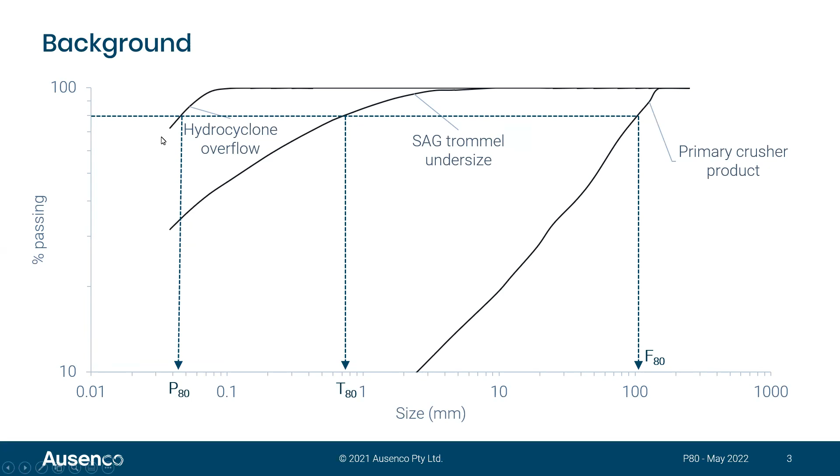So if you use this T80 on the transfer size, it actually results in a much coarser size distribution than you'd expect from the amount of fines. Or put another way, the amount of fines is much greater than you'd expect with that T80 if the slope of that line was parallel with the primary crusher and the cyclone overflow.

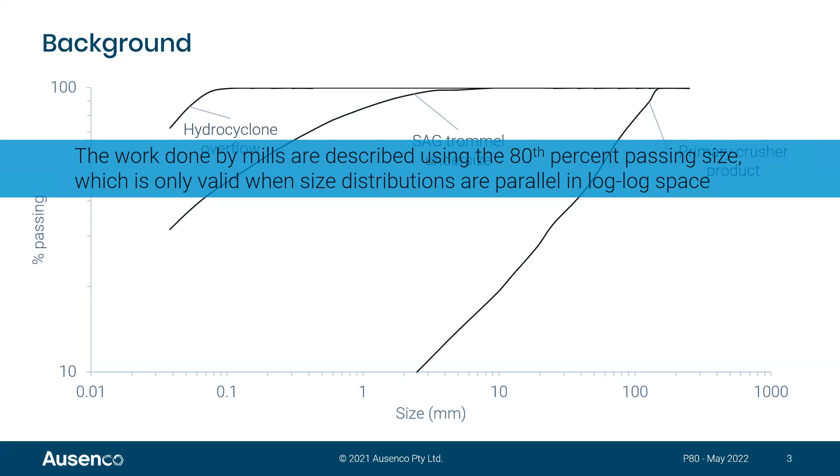So what that results in is that the work done by the mills can be described using the 80th percentile passing, but it's only valid when the size distributions are parallel in log-log space. And the reason that the size distributions aren't always parallel is due to differences in classification, breakage mechanisms, particle selection processes, and they can result in these non-parallel size distributions with more modern equipment like the SAG mill and the HPGR and the stirred mills that weren't really used in Bond's day.

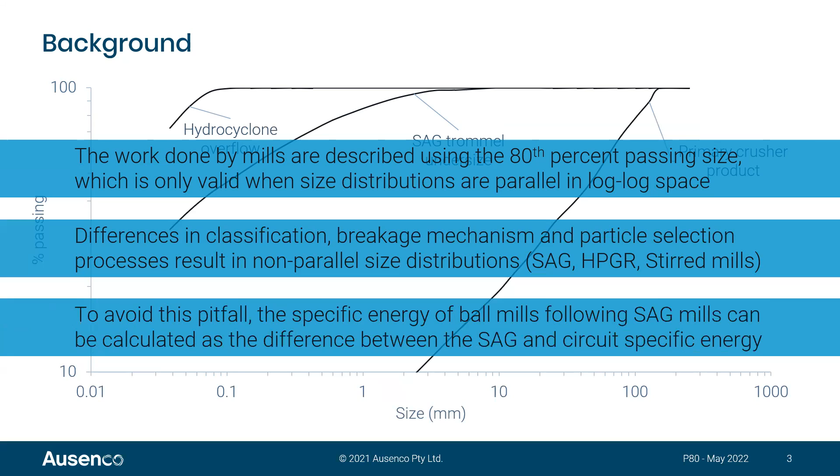And so to avoid this pitfall, and Morrell was the first one to look at this, I think, we can use the F80 of the primary crusher product and the P80 of the cyclone overflow because they're parallel in log-log space, and then calculate the SAG mill specific energy separately and use the difference between the SAG mill specific energy and the circuit specific energy to calculate the ball mill specific energy requirements.

So that's what a lot of calculations do nowadays. There are still some calculations that you'll probably be aware of that still do use transfer size, and they get around this in a multitude of different ways.

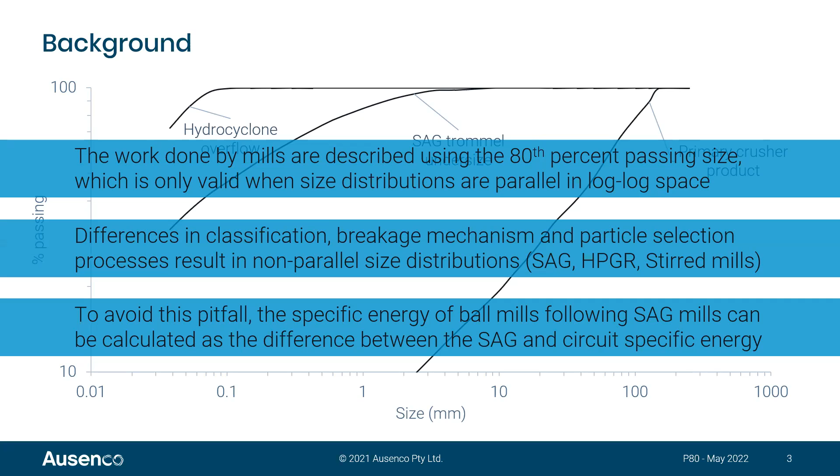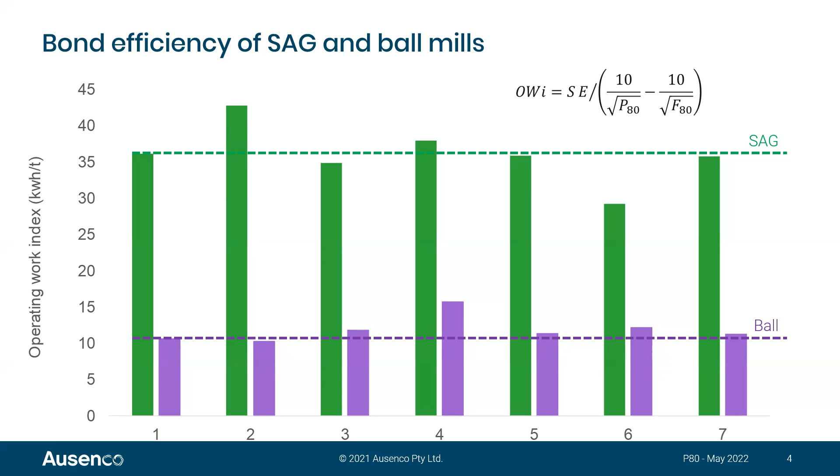If you use that T80, the SAG mill looks like it's expending a lot of energy for not much reduction in comparison to the ball mill. And that's the issue around using that 80th percentile passing for SAG mill products. So yeah, 3 times the energy or more in this way of looking at it. So this is what I was saying. Using the T80, this is what it looks like.

One of the things I'll be talking to you about in this talk is using the fines production instead. So at the fine end of the size distribution, that is typically more closely related to the surface area production. The surface area of the fines is much greater than the coarse end. And if you look at Rittinger's theory that energy is proportional to the surface area production, we can use this fines production as a proxy for surface area.

You might ask, why don't we use surface area? I found it difficult to measure surface area. There's a multitude of different ways of measuring it, and the measurement of surface area is dependent on the way it's measured. Anyone who's looked at measuring the circumference of a continent in high school, you'll remember that it depends on the actual size of the rulers that you're using as to what you get for a continent. Same's true of particles. So this is a simpler and more consistent way, I think, of looking at that.

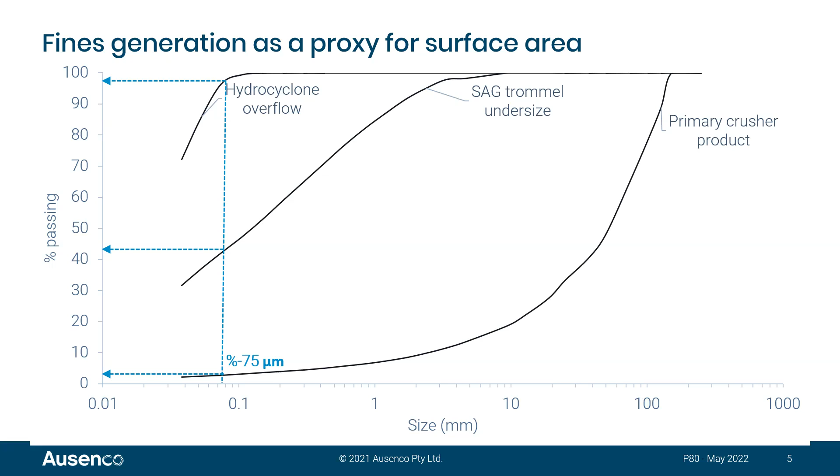So if we look at, I'll just go back to this. So the production of fines, we can look at that against the specific energy consumed, and that was called size-specific energy by Malcolm, who's on the call. So he kind of coined that term in 2010, but there's been many different people that have used it before. So we can look at Marco, who's also on the call, who looked at using the kilowatt hours per ton minus 75 micron.

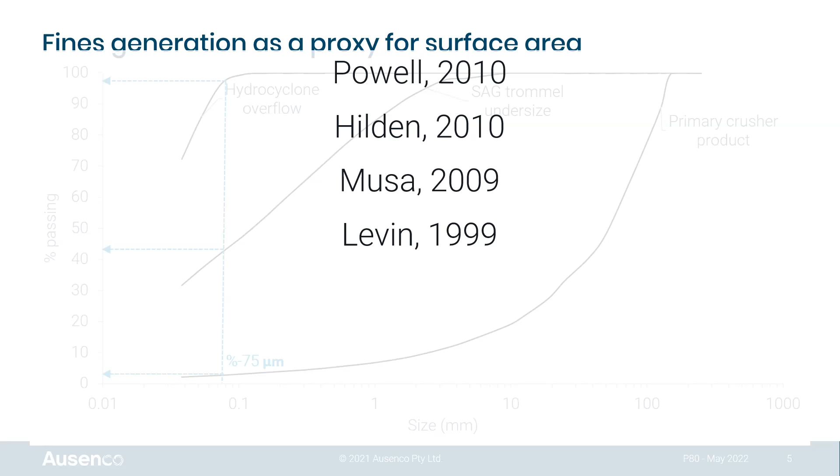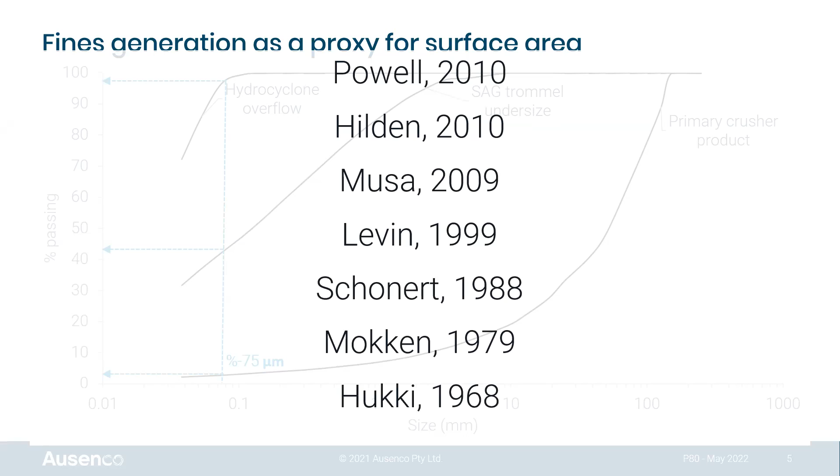So in 2009, Musa looked at it, and prior to that, Levin, who produced a whole grinding test related to this. Schonert actually presented some data in this way in 1988. Mokken was in South Africa, looked at different mills, milling efficiency and discharge efficiency based on the production of 75 micron per specific energy.

And Hukki also looked at this in 1968 when he was looking at the efficiency of ball milling. But the earliest reference to what we now refer to as size-specific energy was actually Davis in 1919. So well before Bond, actually. Davis, when he was looking at his fine crushing paper, looked at the kilowatt hours per ton of minus 200 mesh produced, and actually 200 mesh is about 75 micron. So this has a long history of being used.

I guess I'm one of the newest converts to this, and someone that looks at this regularly nowadays, and I think it's even more important nowadays as the shape of size distributions is more irregular in a lot of breakage devices. So when we look at size-specific energy, I've got the equation on the top right. It's pretty easy. Specific energy divided by, in this case, 75 micron generated. So the 75 micron in the product minus the 75 micron in the feed.

When you look at that same data that was presented before, where the SAG mill looked like it consumed 3 times as much energy for size reduction as the ball mill, when we look at it in terms of size-specific energy, so the production of fines, they're actually on par with each other. In fact, there's 3 tests where the ball mill is more efficient. There were 3 tests where the SAG mill was more efficient or consumed less energy for 75 micron production. And there was one test where they were essentially exactly equal.

And this is what I've seen over a number of different surveys. This is just one data set. But there's been a number of different surveys where I've looked at this and found that in general, when the SAG and the ball mill are operating at similar efficiencies, they receive a similar size specific energy, and they can be compared on equal terms using this measurement.

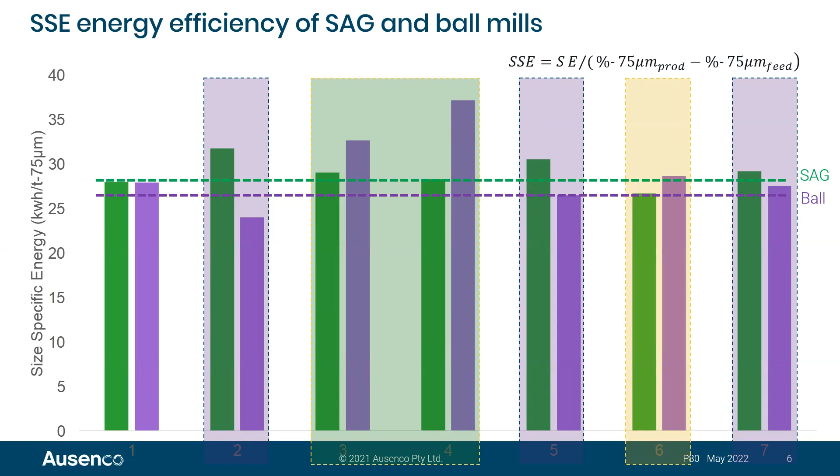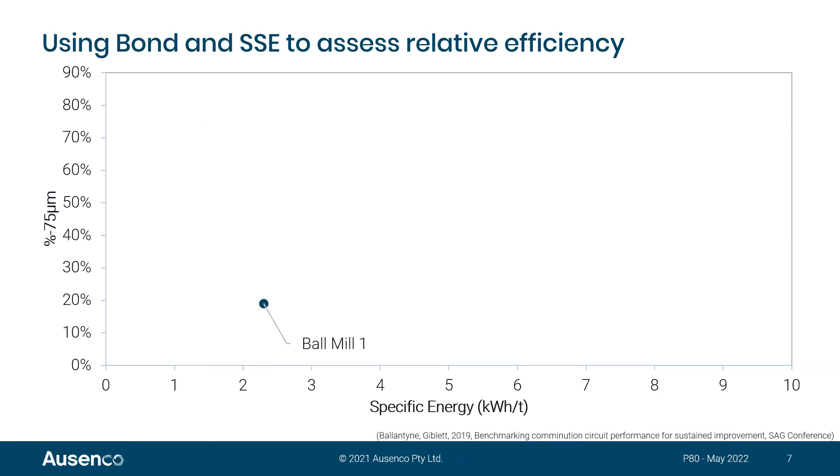So the other thing that you could do here, so you can present it as size specific energy, but the other way you can look at it is by plotting the 75 micron generated, or the percent minus 75 micron generated, against the specific energy consumed. And in that way, you can plot individual pieces of equipment and compare them against each other. So we can look at where the circuit sits here, and you can see that the SAG mill in this specific case consumed less energy to produce 75 micron than the ball mills did.

So there's this potential improvement that you can see here if you're able to get the ball mills to produce a similar amount of 75 micron for the specific energy consumption. But that's just comparing individual equipment. What I presented in this SAG conference paper that's referenced below is that you can actually benchmark this against the Morrell or the Bond efficiency. So compare it against standard characterization techniques. And that gets you your final point here.

And we can see what the potential then is of each one of these mills and measure the efficiency of those mills. Those arrows don't line up, unfortunately, but you can imagine what I'm saying there, and you can look at the paper for more information on how to complete those calculations.

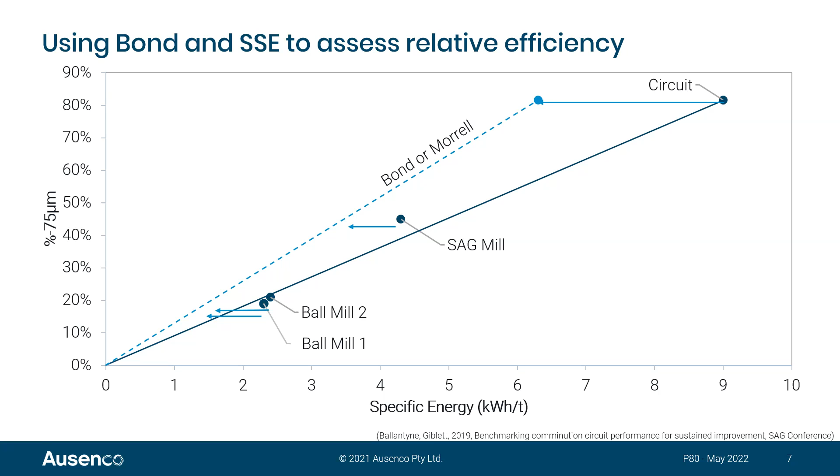But for those keen-eyed observers amongst you, you might have noticed that I'd used 75 micron in this example, but actually in the hydrocyclone overflow, we're not in the linear component of that size distribution. We're right in the shoulder, and we're above 90%. It's never a good idea to use a marker size that's above 80% of the final product. As Bond noticed, the size distribution does tend to roll over above 80%. So when you use a marker size that is above that 80th percentile, it does result in incorrect results, I guess, as most of the surface area is in the finer proportion.

So there is nothing magical about 75 micron. It was used in all of those publications that I referenced earlier. That's because it is very useful in typical plants, but there's no magic about it.

And actually, what I found is that using the P80 of the final product, the cyclone overflow, you can look at the percent minus P80 of the SAG trommel undersize, and that actually changes the mathematics of the equation, and you can have a measurement for the ball mill that is independent of the SAG mill. I said earlier that typically we do our sizing.

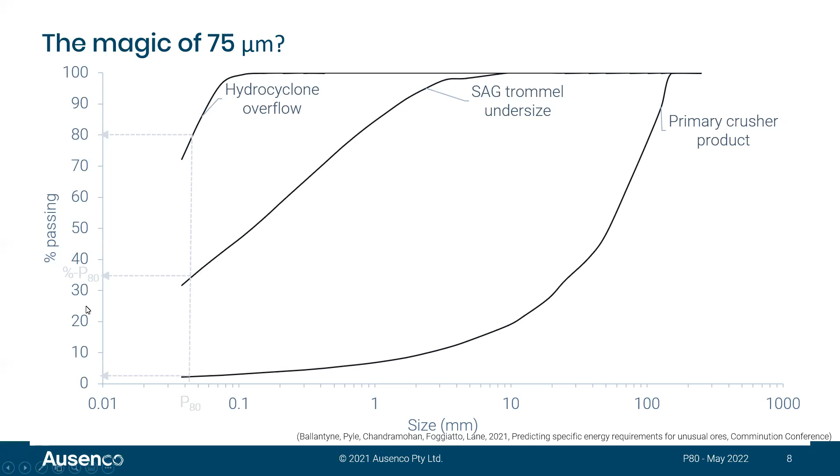But just to show you how that would work, here's some data from Saucito, and that was collected by Juanjo, my student at the time, and myself in Mexico. And here we didn't use 75 micron, we actually used 53 micron. That was a better measure for this particular plant.

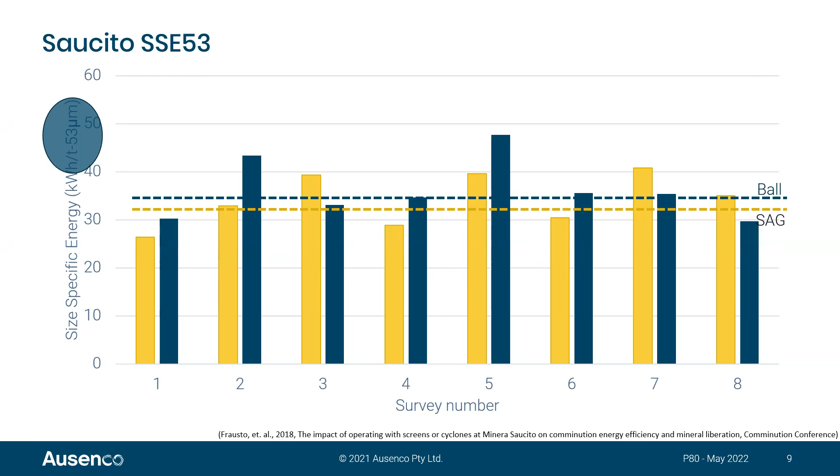And here you can see the SAG and the ball mill. Similar, we had 8 surveys, and they had similar performance across the size-specific energy. But there were differences in the different surveys, and those could be explained with different operating practices there.

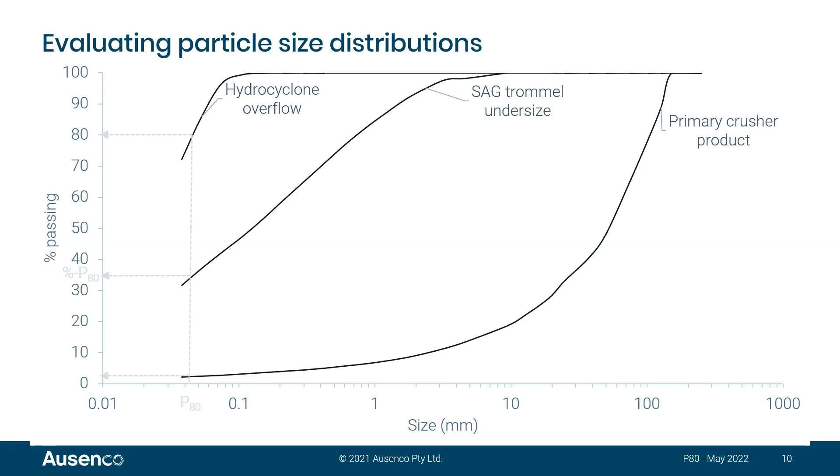So we can change the marker size, but the other thing that always concerned me or interested me was if we pull those into log-log space, which we're now in here, what happens if we include the gradient at that point where we're looking at the marker size?

So I started trying to look through this. I guess this is the part where it's more research, and I don't have any good conclusions, just some interesting trends that I've noticed. And this is the point where I think a lot more research could be done, and I hope it is done, and that maybe people in the audience take this up.

But if we look there, not necessarily at the gradient, but at different marker sizes. What if we use 75 micron, 53 micron, 38 micron? We use a whole range of different marker sizes. We can look at the size-specific energy at multiple marker sizes.

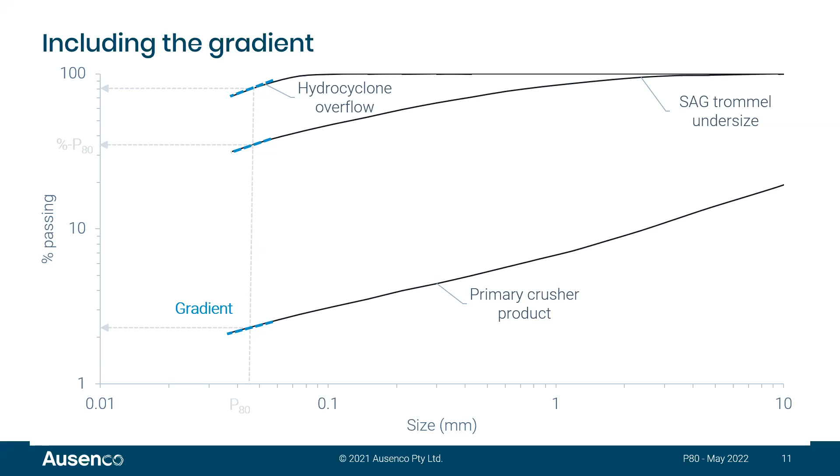So if we go back to that Saucito case that I was talking about, we can do the size-specific energy at multiple marker sizes. So if we look at the SAG and the ball mill alone, this is the first survey. The ball mill consumes more energy at the 53 micron than the SAG mill. And if we look at multiple different marker sizes, you can see this trend starts to develop for the SAG mill.

There's a linear trend in log-log space, and the ball mill has this linear trend up to a point where it starts to roll over. And that's because actually at that point, it's an incorrect marker size. So this is when we go beyond that point that I was talking about where above P80, the size distribution starts to roll over. So this is a good way of also working out where an effective marker size would be.

But looking at the different marker sizes, you can compare the SAG and the ball mill once again at multiple marker sizes, and they have a similar relationship, and they're parallel in log-log space. Now that was one case. There were multiple surveys. One of them was low density in the ball mill. That's why the ball mill was underperforming in this case on the left.

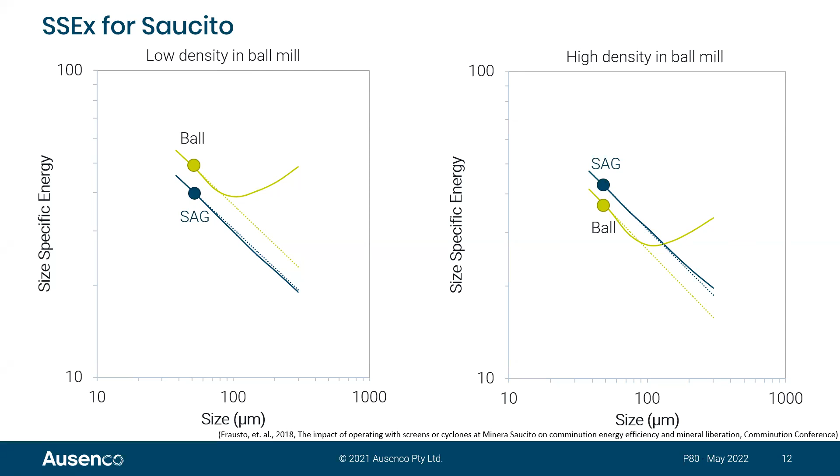And this is when some work that Dion, who's also on the call today, started coming up in my head. He has always been interested in fractals, and he can explain this much better than I can. But for those who are interested, there's a lot of work that was done in the 90s on fractals, and determining the fractal nature of fracture.

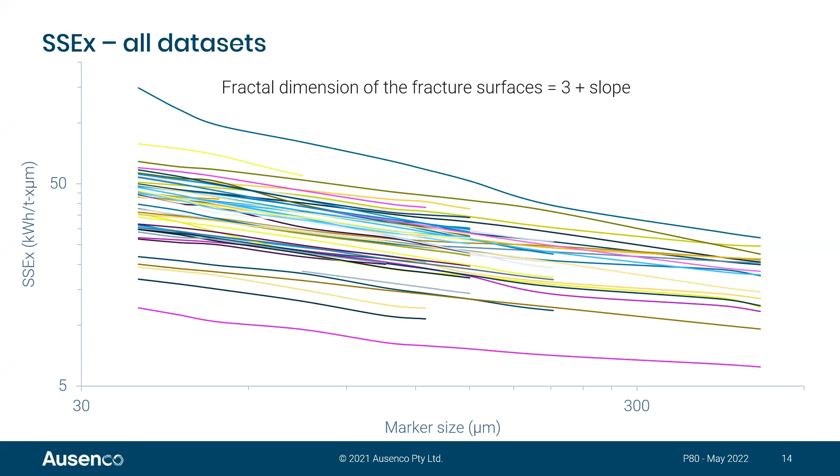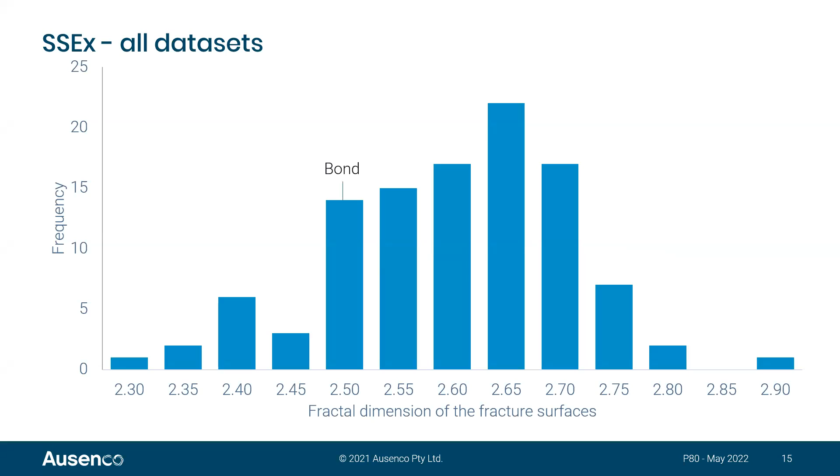And when you looked across this database, I saw this very consistent slope turning up. And actually, across the database, they were very similar. And I could have a look at the distribution of that. So if we look at the distribution of all those data, the fractal dimension of the fracture surfaces range from 2.5, which actually represents Bond, up to 2.6 and possibly as high as 2.8, which is actually the Morrell area. So if you look at Morrell's initial gradient term that he coined in some of his work, that actually relates to this 2.5 to 2.65 region.

So I thought this was interesting, and I thought it was a way that we could maybe describe these size distributions, and it does tend to be ore specific. I've found a lot that has said this is ore specific, but it's also equipment specific. And I'll show one of those scenarios at the end, with some new stuff that I've done more recently. But yeah, that I think has a long way to go. I still can't explain it well, so I don't think I'm going to be the one to take it forward. But I think this should be picked up and used in research, and someone should look into this in a bit more detail.

So I'll now go into some recent examples of using this. So one is coarse stirred mills. I presented a paper with a couple of colleagues at the Mill Operators Conference last year that looked at coarse stirred mills and the efficiency of coarse stirred mills. The example on the right here is a survey of a stirred mill following an HPGR. And if you took the final slope, the actual size distributions there, the stirred mill was operating at about 68% efficiency in comparison to Bond.

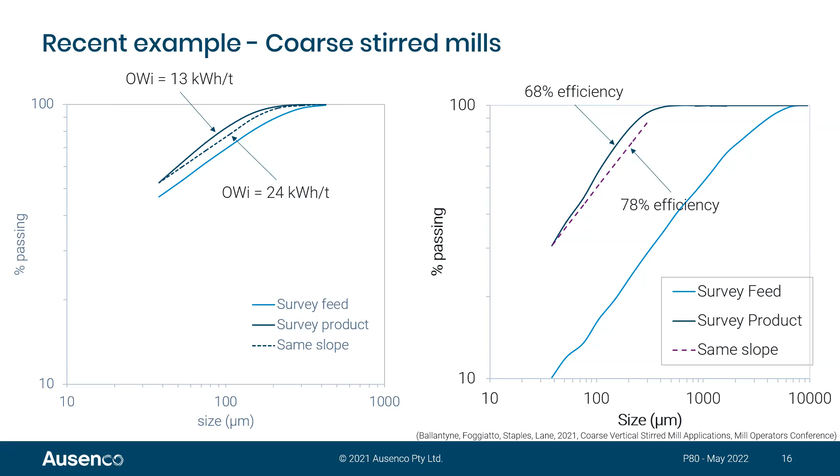Another recent example, this is actually modification of test work. So we received these 2 rod mill tests. We only had 2 tests, unfortunately. There wasn't much sample for a specific study that we were doing at Ausenco. And there were 2 rod mill work indices. One came back at 10.5 and one at 6.8. So there was a marked difference between these 2 tests. Now, which one should we trust was one of the first questions that came up. So I actually did the size-specific energy work on this, and I looked at the percent minus 300 micron in this case in the feed and the product.

And when I actually did the size-specific energy of those tests, they came out exactly the same. So although the rod work index was different by about 40–50%, the size-specific energy was exactly the same. So I went, well, what's going on here? And the issue was actually the difference in feed size.

So test 1 had a much finer feed size. There's also this bimodal distribution, which is a bit of an issue as well. But test 1 had a much finer feed than test 2. And because it had a finer feed, test 1 required fewer revolutions to get to steady state. So it had a coarser product when you looked at the fines production. The P80s were very, very similar, but the fines production then went away from each other.

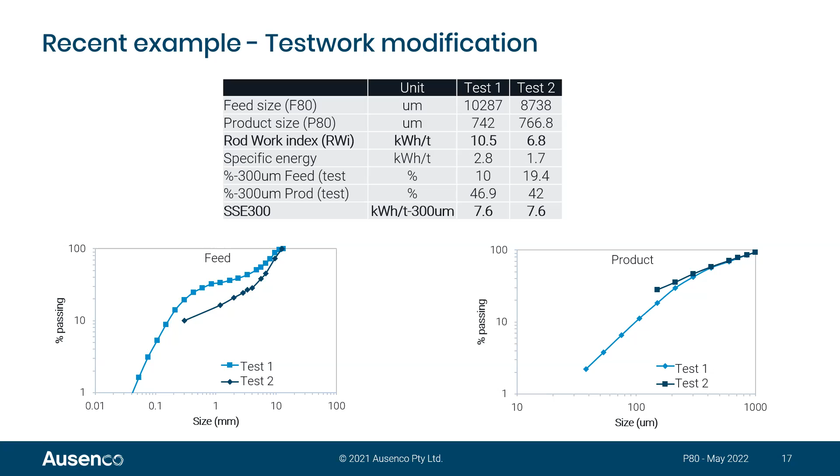So that then allowed us to design on 7.6 kilowatt hours per ton minus 300 micron. So we had a consistent basis to design on, rather than this variable rod work index that you can see above. So that was another way of looking at size-specific energy.

And this final one, back to fractals, and the differences between HPGR and stirred milling. You can see here in these test work, the stirred mill results came out with a much lower fractal dimension. So they tended to more bulk splitting, less crack branching than the HPGR results, which had a much higher fractal dimension. It was still lower than the SAG mill, but it was much higher there.

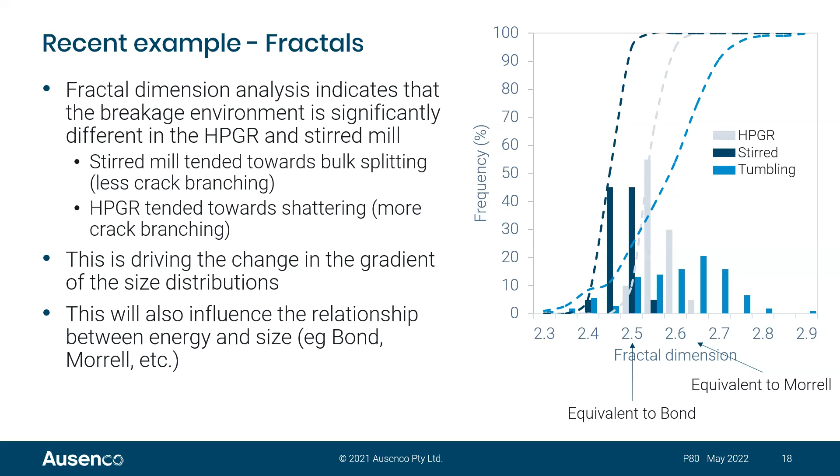So that was an interesting result, because the HPGR tended towards more shattering or more crack branching. And this drove differences in the gradient of those size distributions. What we worked out was it also influences the relationship between energy and size, like Morrell and Bond does. So there's another relationship that needs to come in there that looks at this. But yeah, there were some interesting results that came out of some work that I was looking at.

And I think this is the final one. This was actually only a couple of weeks ago, where the feed size distribution to a milling circuit had this bimodal size distribution. And I looked at two different ways of assessing the effective P80 of that size distribution, because if I used the real P80 out at 4 millimeters, it would result in issues like I showed in the SAG milling work earlier.

So I looked at extrapolating up from the fines, the linear section, to where that crosses P80, and simply going down there, and that resulted in 1.6 millimeters. And the exact same effective P80 was found by another approach, which was describing this size distribution with two parallel size distributions with different P80s, but the same slope, and different mass splits. So I fitted the mass split and the P80s of those two size distributions to minimize the sum of squared errors. And that resulted in the exact same effective P80 of 1.6 millimeters.